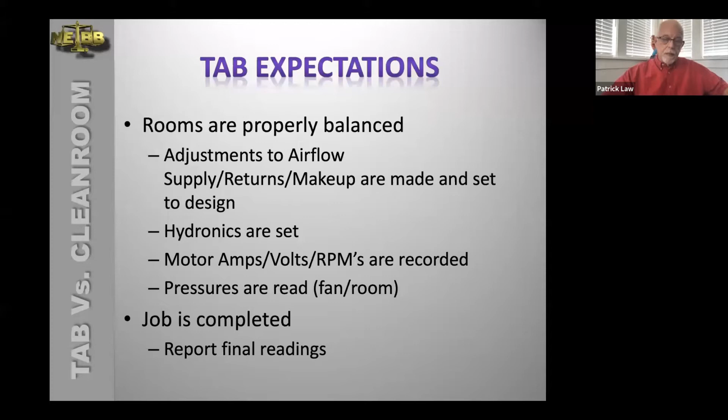Maybe in some cases you get into the room and look at the pressures there as well, but generally on most TAB jobs, I don't know that you guys do the pressures from room to room or rooms to outside the building, but that becomes a big part of what we do. But your job is completed and you report your final readings. From a clean room standpoint, the TAB is complete.

Various multiple clean room tests are conducted in a sequence. Results are evaluated for acceptance. If out of compliance, adjustments are made either by us or maybe others, and a lot of times this goes back to the TAB technician. If something needs to be adjusted for one reason or another, retest to verify compliance. Final results are done and a certification is issued.

And then here for us, documentation becomes extremely important in a lot of the fields we deal with. It seems to rule everything they do.

Briefly, types of clean rooms that are out there. You have unidirectional, and unidirectional usually means roughly that 80% of the room is supplied; it's got media coverage, not necessarily the frames. That's taking the frames out, but the media itself where the air enters the room. Usually 80% of the ceiling, sometimes a wall, but that clean room will have 80% media coverage where the airflow is flowing in at 80% of the ceiling.

Non-unidirectional type of clean room. This could be anywhere from having HEPAs scattered throughout to having just a few, to having 50% or 60%, doesn't matter. As long as you don't have 80%, you're not unidirectional.

Membrane clean rooms are a type of clean room we don't see much anymore, but they can be very effective in what they do. A membrane ceiling will have HEPA filters that enter into a small space that's confined below the ceiling, and you put a membrane in that repressurizes that small enclosure, and therefore directs the airflow evenly across that whole room, as opposed to just at the points where the HEPA filters are in the ceiling.

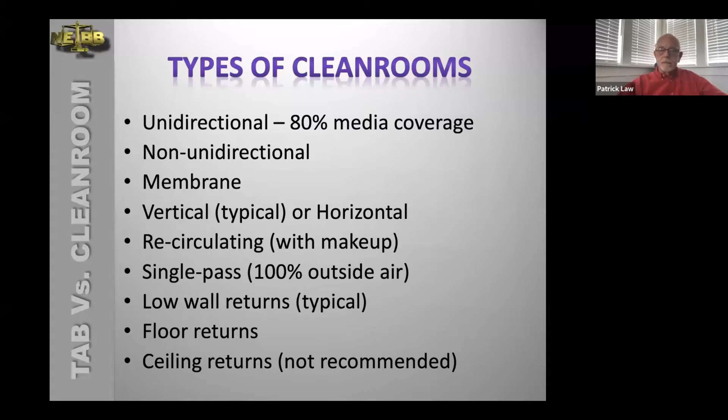Clean room styles: you have terminal HEPA filters. They can be ducted, which is, again, the most common. You'll have either 10 or 12-inch ducts that run off a fan, a duct run or something. You do have filter fan units. We call them FFUs, and they have their own onboard motor blower. And the HEPA filter, again, typically 24 by 48, same as ducted HEPA filters. You'll have some 24 by 24s on the fan filter units as well, or even some larger ones now. But these filter fan units all have an onboard motor blower.

So generally what happens is you have an interstitial space above a clean room that has a bunch of these terminal HEPAs that are filter fan units. They don't provide any conditioned air. All they do is recirculate the air. So you have to bring conditioned air into that same space from your main AHU, and then the return. So you have a mixture of these filter fan units that are supplying the air changes that might be required for that particular clean room. You don't need as big a fan other than the cooling capacity to help cool that space.

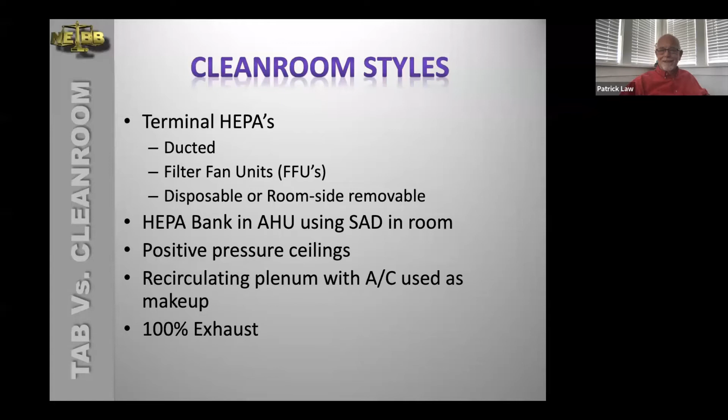So regulated industries: you have pharmaceutical and medical device that go on FDA guidelines, and a couple others. You have compound pharmacy. A lot of hospitals follow guideline USP 797, and every hospital that does any kind of compound pharmacy, which is almost every single one of them, has got to have a clean room installed and working properly. So there's a lot of potential there. And this is somewhat new, probably in the last 10, 15 years. So they're still trying to learn what's needed and required.

Because there's so many hospitals across the nation, in TAB you're going to find yourself in a lot of hospitals. There's a lot of work that can be done there, and understanding what's needed, because you do have some positive and negative pressure rooms required in a 797 facility, and that's in every hospital that does compound pharmacy. Hospital operating rooms will sometimes have HEPA filters and clean rooms in them. It may be a wall of them, or it may be above them. I've seen both.

Isolation rooms sometimes have some filtration, other than just limiting the pressurization. Bone marrow rooms, I've seen those where right up against the headboard you have a whole bank of HEPA filters, because the immunity of people getting a bone marrow transplant is almost nil. So they've got to keep out as much contamination as they can when that person's having that done. So these bone marrow rooms will have HEPA filter banks in them as well, horizontal rooms.

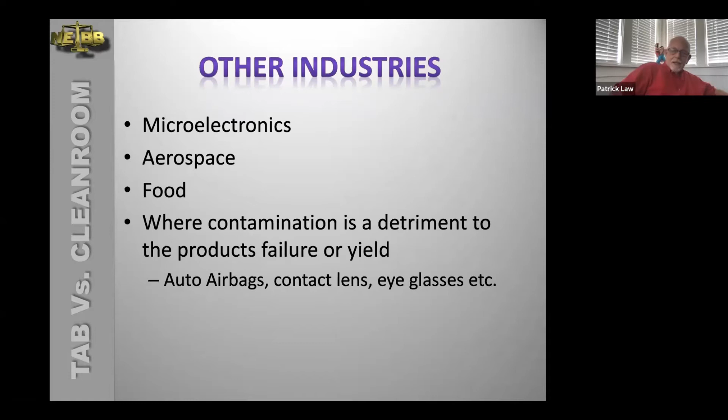Your product yield will go up a lot, because the air in general is clean. It's doing its job. At least the one I tested seems to be doing its job. So it's just a matter of it picking up all these extra particles that are in the environment because of the airflow being as great as it is and nothing being cleaned. And they reported back to me 2 weeks later that just by doing this, and I think they did it once a week, they had increased their product yield by another 15%. So other industries do use clean rooms and HEPA filters.

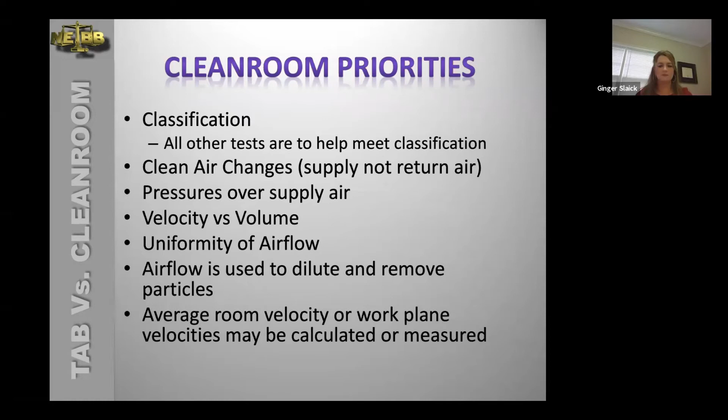Okay, I have one more question. This individual says, are they talking about a biological safety cabinet? Yeah, that may be. In a biological safety cabinet, you do a negative, then you actually use a hood in the reverse, and they have them that are made for biological safety cabinets to do that. And they do call for blanking off part of that, because they don't have one that fits every size, but yeah, you can blank off a small portion of that.

It's usually an 8 or 10 inch opening, and your flow hood should be the majority of that. And if it doesn't reach to the end of it, yeah, you can take a little bit of that off. But that would be the only time that it would be. But you don't want to use a real small one and blank off half of it either. You're still going to lose a little bit because of that back pressure. Okay, thank you.

So we're talking about clean room priorities here. Velocity versus volume a lot of times. Not all the time, but again, if it's a unidirectional flow room, we're going to take velocities on that. We're not so worried about the volume there, but the uniformity of that velocity. Hence the second point, uniformity of the airflow.

That's important. Airflow is used to dilute and remove particles, and that's why these are up there. They don't bring any in. They're just used to help dilute and remove particles to keep an environment that is to a particular level. And it may not be 100% particle free, but it's got to meet certain requirements of particles per cubic foot or cubic meter.

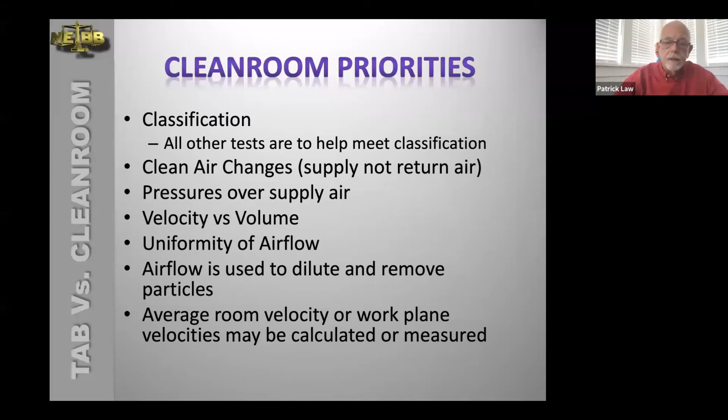Average room velocity or work plane velocities usually can be just calculated. They're not measured as easily as calculated. I think we're changing that. In clean room testing, we have 4 mandatory tests that are conducted. We get the airflows, which you guys do already, and room pressure differentials. You guys know how to take room pressures, so that's something you know how to do already.

HEPA filter leak testing, that's probably out of your ballpark if you haven't done that. And cleanliness classification, again, if you have never done that, it's a little bit to get caught up on. But most of the tests done in clean rooms, of the 4 mandatory tests, you guys know how to conduct half of those already. You may have to look at specifics on airflows because there are some differences, but the instrumentation and most everything else is pretty similar to what you already know.

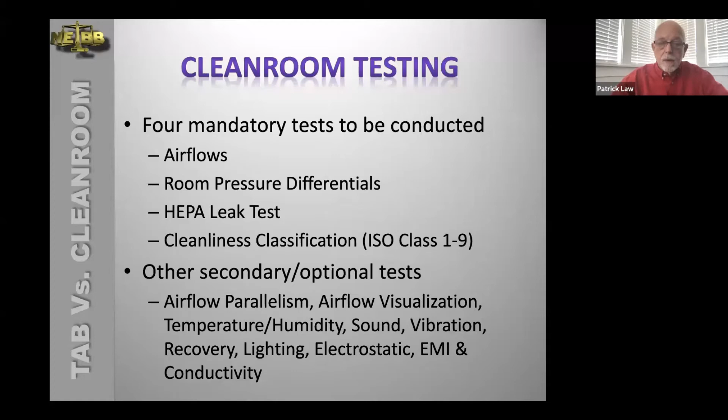Here are the other secondary optional tests that we do: airflow parallelism, airflow visualization, which is similar to that, temperature, humidity, sound, vibration, recovery, lighting, electrostatic, EMI, and floor conductivity. EMI is electromagnetic interference. The electrostatic, EMI, and floor conductivity are found mostly in semiconductor, where it's more critical to their process.

Test methodology, again, the major difference between our 2 disciplines is that TAB uses one source, when you look at how am I supposed to go out there and do a test and balance on this project, as a NEBB technician or professional.

Your one source is the NEBB procedural standards on testing and balancing. And there's not been a whole lot of major changes to that methodology in the last 50 years plus that NEBB's been in existence. However, clean rooms, we have multiple sources and choices. It's always evolving, and audits and justifications always seem to be evolving the standards by which we test and certify clean rooms, unlike what TAB's had to do in the past or currently does.

Pat, I have two questions, if I could pause you for just a moment. Sure. The first one: is there a certification for performing DOP testing, dispersed oil particulate testing? Ask that again. Is there a certification for performing DOP, dispersed oil particulate testing? And there was something else.

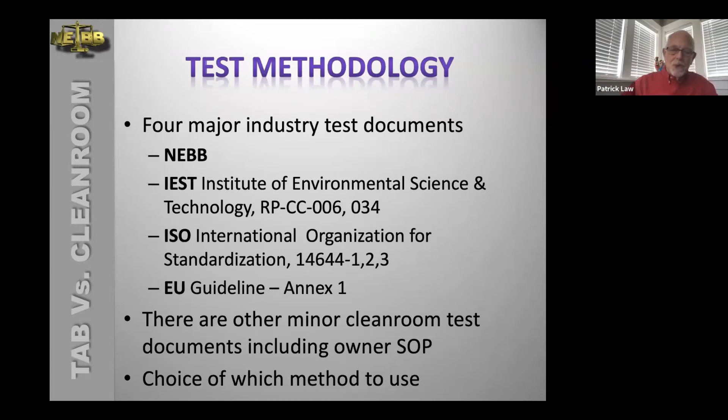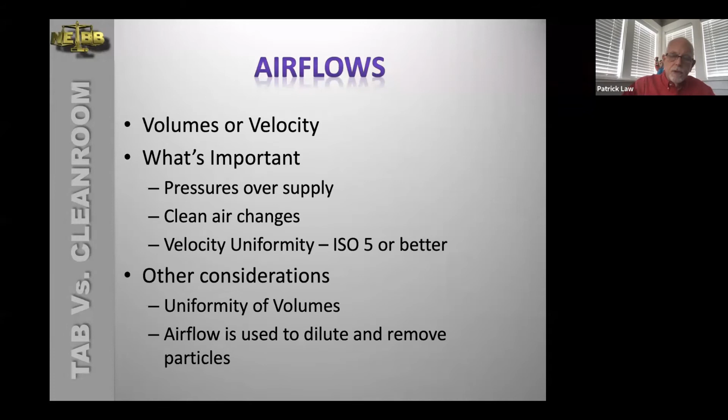And when it comes to airflows, other considerations: uniformity of airflows. Even when we don't have a lot of filters in that room, to keep the distribution of temperature and such across the room, they still have to be balanced just like HEPA filters would be in, say, 80% ceiling coverage. And again, airflow is used to dilute and remove particles. Air exchanges, a little bit of difference here.

Nominal air changes is the amount of outside air ventilation from one air handler entering a building or zone, but it does not include recirculation air or the distribution of the ventilation air to each space within a zone. Unlike space air changes, which is what we deal with. What's important to a clean room is to calculate these space air changes, because it compares the supply airflow rate to the volume of the space that you're testing.

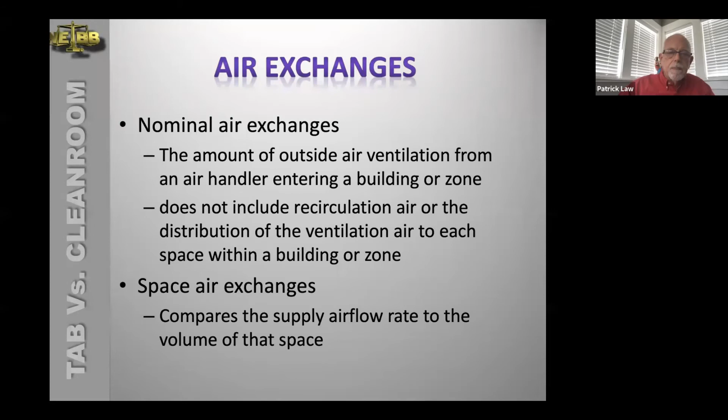Airflow volumes done are very similar to TAB, best if done the same. A lot of times we may have to ask, do we use back pressure on this? Do we not? Curtain size, as I said, that was one of the questions that came up, but the curtain size should always match your register filter size or whatever else you're measuring there.

And what we do a lot of times is we like to check ours against a TAB. Sometimes we'll be on a facility where TAB's still doing TAB work in another part of the building that doesn't affect the clean room. So they may still be on site, but they may have completed the clean room. And sometimes we'll get with the TAB people and say, hey, what are you doing? And we'll compare our flow hood to their flow hood, and maybe put a factor in if we need be.

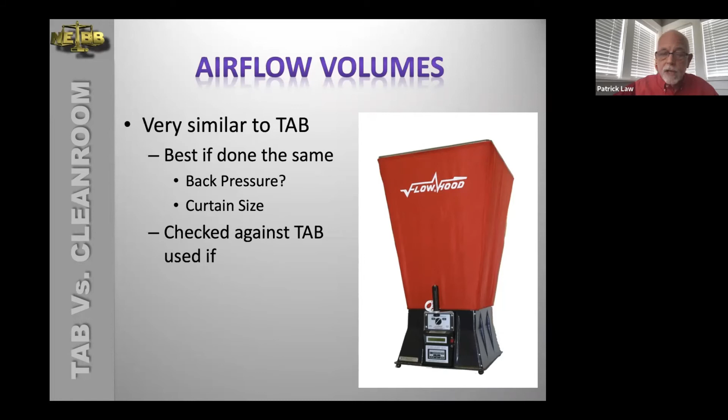Hey, Pat, we had a question about the chart that you showed a slide or two ago. What ISO standard is the chart from? Well, this typical air change chart is not from a standard. This is just typical. Somebody put this together. There's no industry standard out there that says in order to have an ISO class 3 clean room, it has to meet a minimum of 360, greater than 540 air changes, like that chart shows.

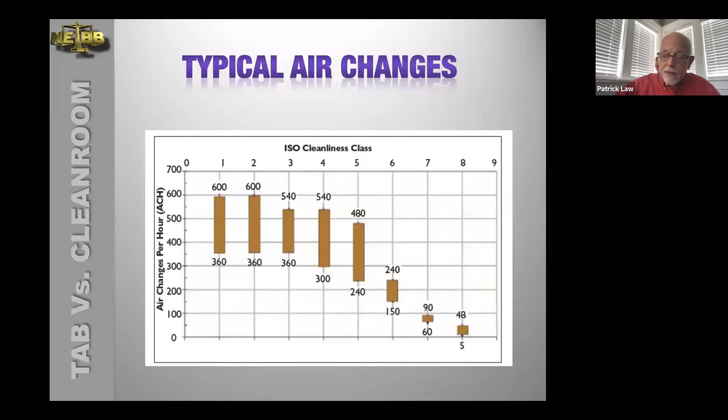This is just a recommendation, and it really is what's been a part of clean rooms for the past 75 years probably. This is what the industry has found to be the needed air changes in order to meet these classifications. There's not a standard that says you have to have that. Thank you.

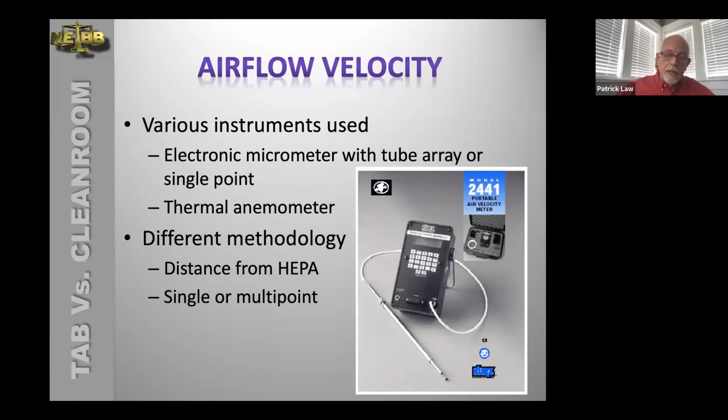Velocity instruments: varied types of instrument, electronic micromanometer or micromanometer with a tube array or single point, thermal anemometer, maybe. Different methodology, distance from the HEPA filter, or single or multiple point. Do I use a single point on this one? Do I have to use a multiple point? How many inches do I have to be down? Listen, it all gets a little bit different.

Some of the concerns are the location of readings, reproducibility by technician, and the repeatability of the readings. That repeatability might be from time to time. We go back every 6 months on a lot of our jobs, and we want to be able to repeat the same methodology and get relatively the same answer. Even reproducibility between technicians, or within the same one, they've got to be able to get that same reading over and over again. So we try to do these so that we have readings that are repeatable and reliable.

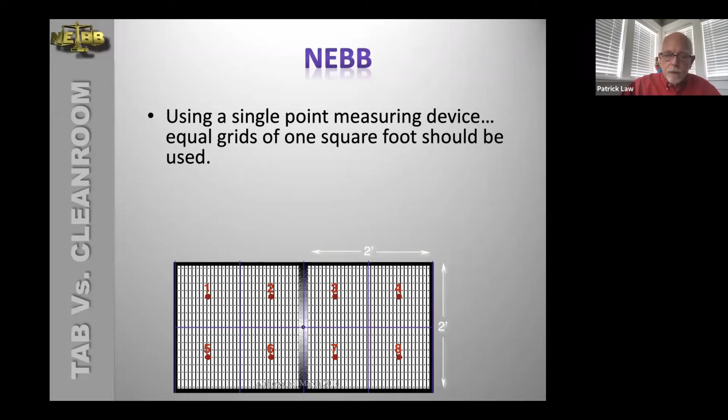I'm going to go through this real quick. Let me back up here. A single point, in our standard and most standards out there, not all of them, believe it or not, requires that on a typical 2x4 HEPA filter, you do minimum grids of 1 square foot. So you would have a total of 8 readings on a typical 2x4 HEPA filter. If you're using a multiple point, it says do 1 per every 4 square feet.

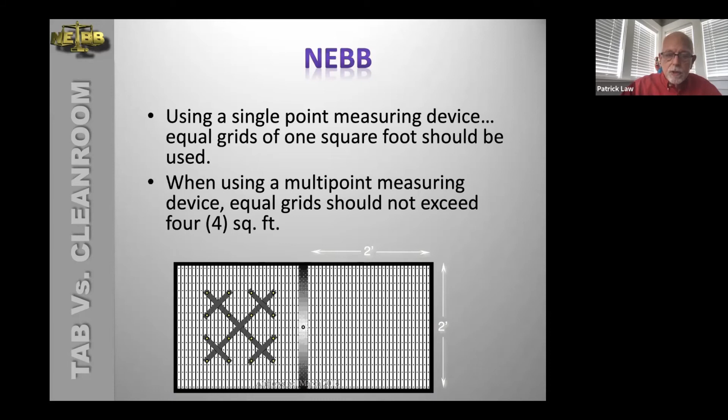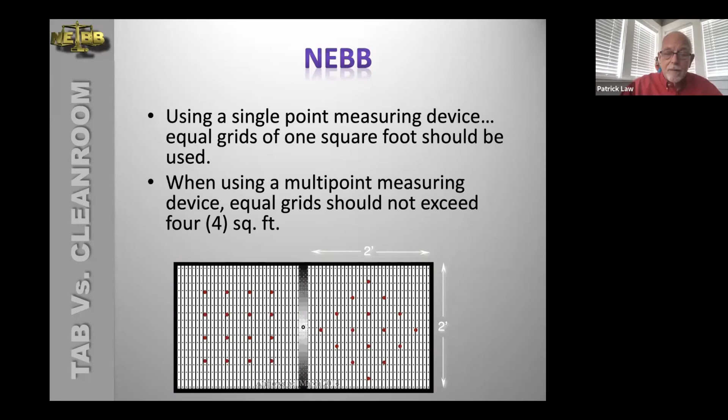These two animations have to do with the 16-point velgrid that you find on a Shortridge, which is used a lot, and some of the others have something similar. If you notice, there's 2 different ways this could be applied, and you get 2 different results. Notice the pattern it takes of the filter; you will get different results depending on how you take it. So my point is, take it the same way all the time. And if you document how you took it, then when we come back, we have that same method.

I'm going through this one to get it out of the way. Variation, going to get it out of the way here.

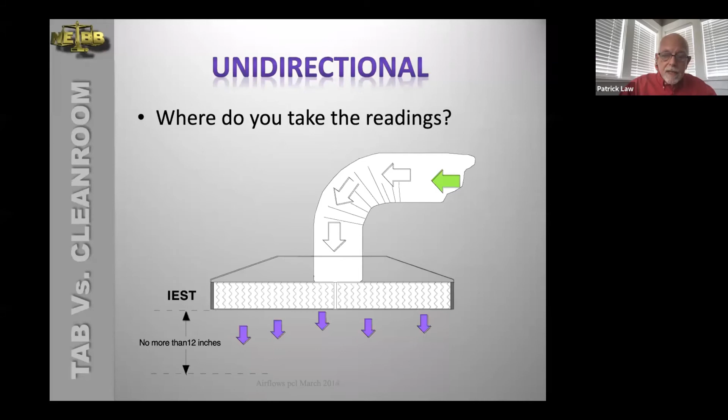Unidirectional, where do you take the readings? Again, like I said, there's multiple standards out there that we have to deal with. IEST says no more than 12 inches from the face of the filter. ISO says 6 to 12 inches. NEBB says take it at 6 inches. So we have 3 standards that say it a little bit differently.

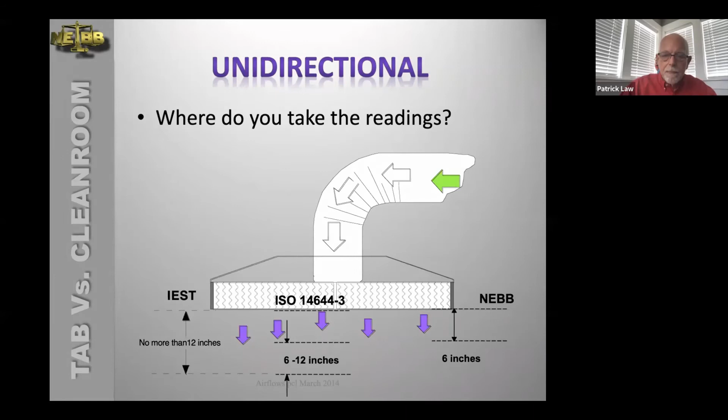But all of them, you can take it at 6 inches and you would meet the requirement. So that's something you have to look at and say, hey, it meets IEST. Yes, it's between there. Okay, it meets them all. Non-unidirectional, a little different. Again, no more than 6 inches now from IEST rather than 12 inches. Again, ISO's the same and NEBB's the same.

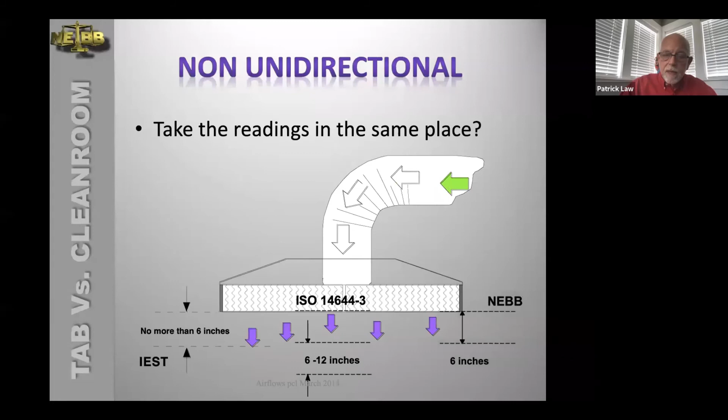Considerations: you document your test method when taking direct velocity readings, how far away you were, and if you're doing a multiple point, how did you orientate it? So that again, it can be done again. Again, when taking volumes, hood curtain should match the filter frame.

Adjustments often use the K sub V factor to calculate, and it adjusts velocity readings when a flow hood won't fit over the equipment due to interference. Again, I know you've been to sites where you're taking readings, but they put a piece of equipment under the supply air diffuser and you can't get a hood up there or whatever.

So what do we do? Now, a supply air diffuser is a little bit different than a HEPA filter. The HEPA filter is still going to exit airflow out and coming down, but I can't get the flow hood up there. So we have to use our velocity at that point and then come up with a K sub V factor to adjust that velocity to what the actual volume might be.

In the industry, we recognize the pitot tube, which we don't really use that much to measure airflow velocity or volume anymore, other than in large ductwork sometimes. But if you have the correct ideal conditions, your duct diameters are right and you have enough upstream and downstream of where you've done your holes and you're taking your readings, then a pitot tube is going to give you the most accurate result.

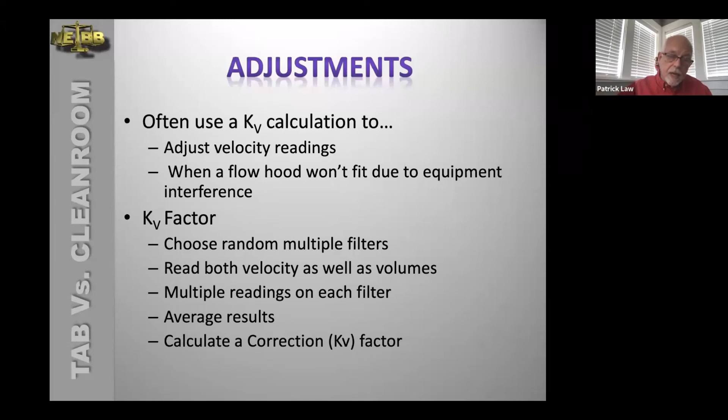And again, very briefly, because I think it's important for you to know, you would choose random filters, multiple filters, 3 or 4 maybe in a room, that are unobstructed, that you can read with a flow hood and velocity as well. So you would read both the velocity and the volumes multiple times on each of those, say, 4 filters. And then you would average those results and calculate a correction K sub V factor.

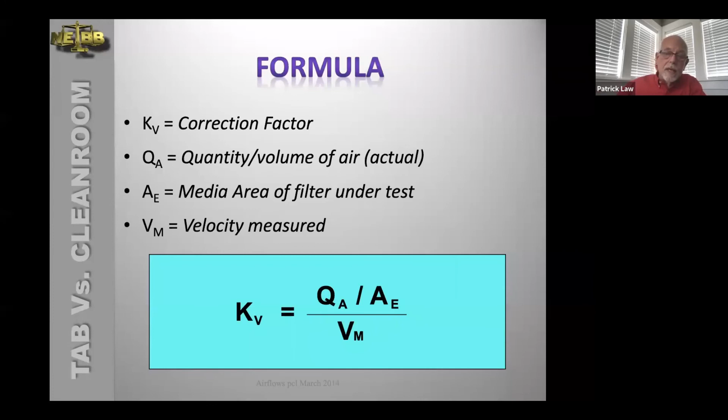So then you come up with a K sub V factor that, when you use the velocity instrument to read that velocity underneath the HEPA filter where you can't get the hood, you would now apply that K sub V factor times that velocity in order to get a corrected volume. That's what that's for. Example, I'm going to get off an example here for you to move along. An acceptance criteria for that. All right.

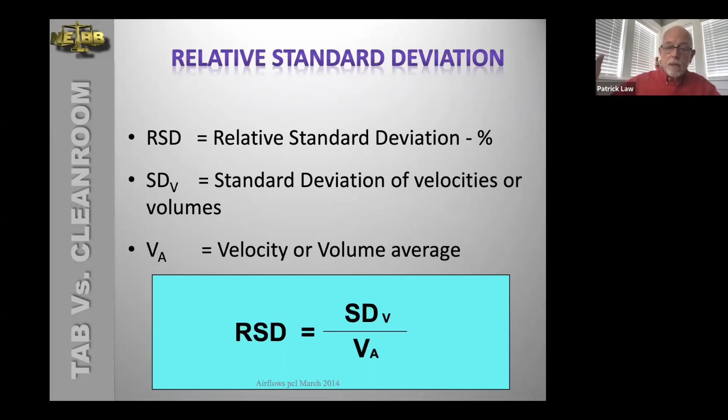Relative standard deviation when it comes to airflow. And that's simply the standard deviation of velocities or volumes divided by the average velocity or volume of those same filters that you tested. And in our industry, the relative standard deviation, almost everything we do has to be less than 15%. So whether we take volumes or whether we take velocities in a room with unidirectional flow, this relative standard deviation must be 15% or less. So that's another thing, again, when you're going out there testing, that's how important it is even in rooms that don't have, that you get these volumes closer together.

Room pressures, most interested in differential pressure between room versus the ambient. The range of differential pressures range from 0.02 inches to 0.07 inch water gauge. And the hierarchy always depends on the classification. You will always have your pressurization start at your ISO 1, if that exists in that clean room suite, to a 2, to a 3, and so on, all the way down to a 9, or to your uncontrolled area.

Just so you know, I've never, and I've talked to a lot of people in the industry, this ISO 9 is a new classification that came out. And to my knowledge, I don't know anybody that's ever used it. It's not even a clean room. It's hard to even say it's a controlled environment. It's so outrageous at the number of particles that are allowed in that environment that we don't even know why there is an ISO 9.

But from ISO general range right now, we go from 1 to 8. So you would have your pressurization cascade from the highest or the lowest cleanliness class ISO 1, if there is, or 2 or 3, whatever that lowest number is, through 8 to an uncontrolled area. A lot of times we take pressure drops on the HEPA filters in the room and record that at new and watch that over time to see what the decay is, so we can give an idea when it's time to change them if they're not doing their job.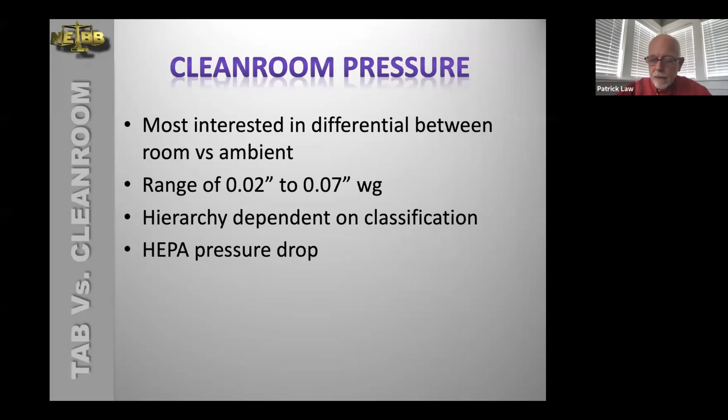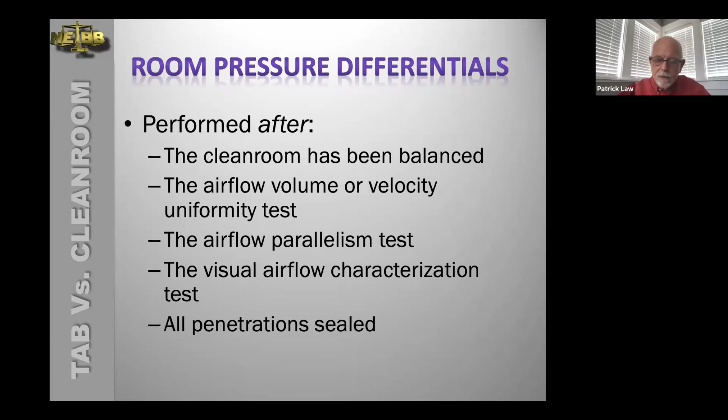All right, room pressure differentials are performed after the clean room has been balanced. The airflow volume or velocity test has been done. The airflow parallelism test, if you're doing that, is done. The airflow visualization test has been done, and all penetrations are sealed. Prior to conducting the test, there are several transient conditions that affect the room pressures: intermittent operation of exhaust hoods, wet stations, ovens, etc. Again, we find tons of those in these clean rooms.

There may be fume hoods in there. It could be biological safety cabinets. There's a lot of exhaust of some of the equipment that's in there because of the heat. It gets exhausted out. So again, as you know, that affects pressure. So when we test, we got to make sure that these things are operating, or if there's any kind of actuating damper that's controlling. If this exhausts, do we up the volume in our makeup air to compensate that and such. So all this needs to be working and operating.

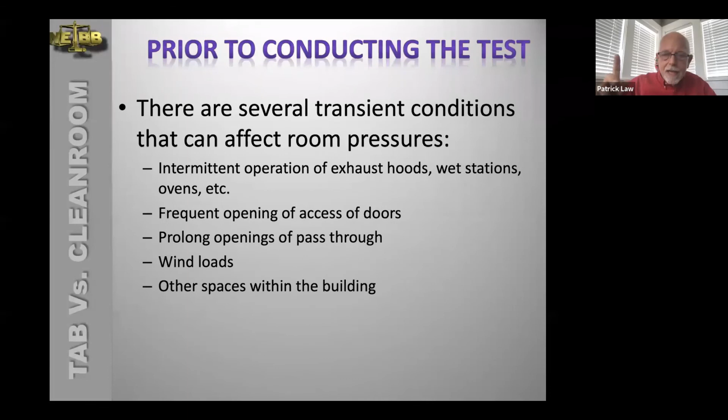Wind loads, listen, I haven't seen that an awful lot. I had one case of it I was going to talk about, but I'm moving on. Conducting the test: electronic manometer, room pressures. I don't think I need this, I'm going to take this off.

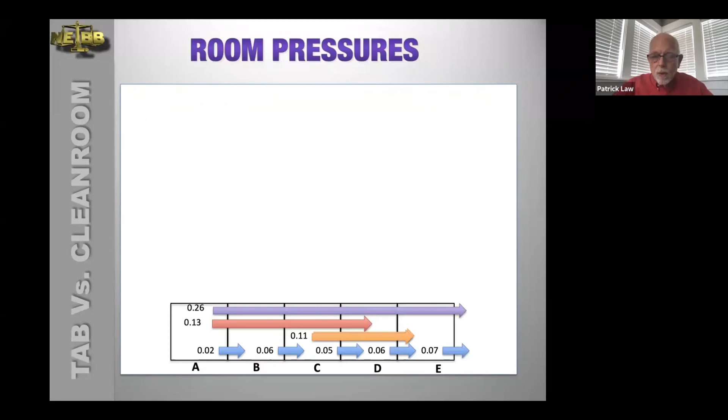Talking about it really briefly: if we had a pressure difference between all these 5 rooms, we can, without measuring from A to outside of E, the outside uncontrolled environment, know what the pressure was from A to outside. I can calculate that by adding those pressures together, which adds up to 0.26. And likewise, I can calculate pressures between different zones if I know all the pressures of each zone, just by adding, or maybe even subtracting, where I have a negative.

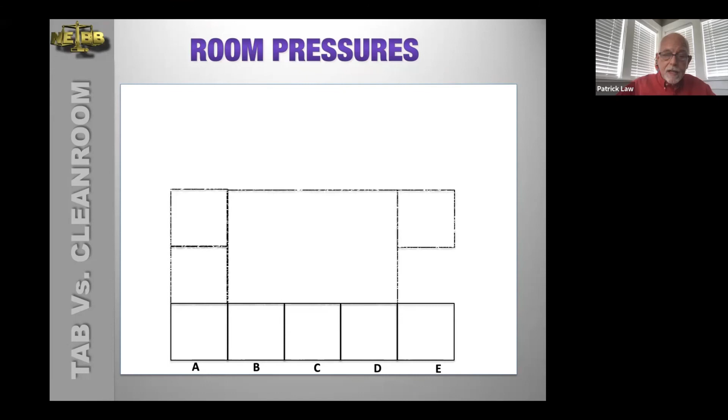I've got a room that's negative to something, but the same way, if I add these all up using that one as a negative, my pressure from A to the outside has now changed. But I likewise can still recalculate different pressures. And I know I'm going through this a little bit fast. I added some rooms and talked about this, and another pressure, but we're moving on.

All right. Acceptance criteria: typical pressures for the guidelines that are out there. You won't find a standard on this, but you'll find a lot of guidelines; the FDA's got a guideline on what it ought to be. The industry will usually have their own SOPs saying the pressure between this room and that room has got to be so much. But typically it's 0.02 inches to 0.06 inches when cascading from one class to a space of another class, or 0.04 to 0.07 when going from controlled to uncontrolled.

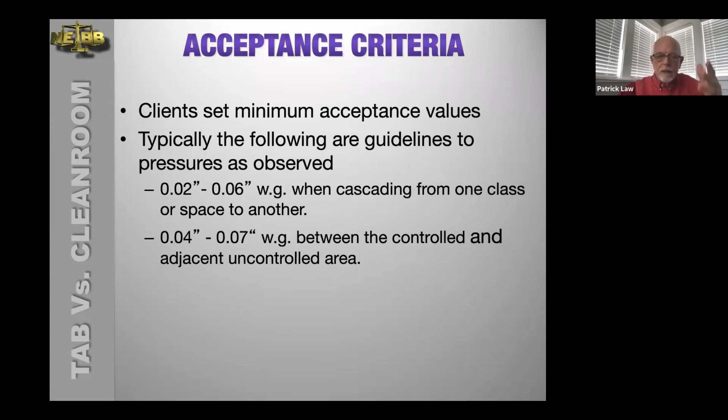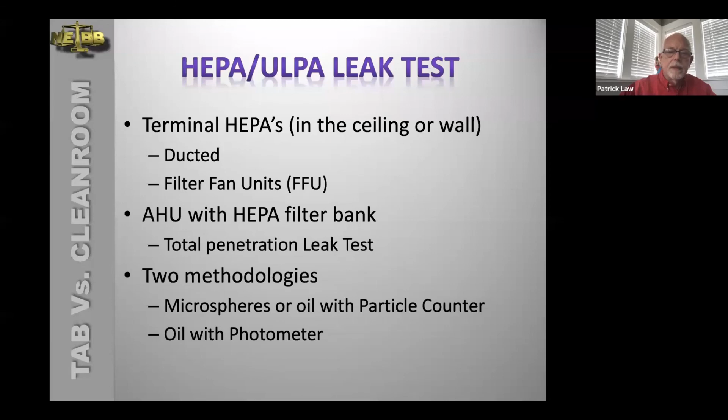The first room you walk into could be an airlock. You may walk from an uncontrolled hallway into an airlock, and that airlock into a gown room, so you have these different barriers, and the pressure from that airlock to the uncontrolled space is going to be higher than between rooms within the clean room suite. Temperature, humidity, duct diversity we talked about. Leak testing, again, we talked about that.

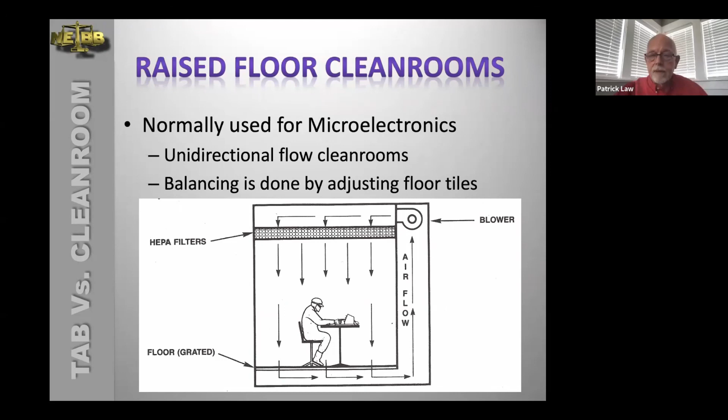That's a typical raised floor clean room where you have a fan supplying, maybe with whole ceiling coverage going down to the floor, so any contamination released at the product level gets washed down right away, rather than going side to side to the sidewall returns where it might have the chance of cross-contaminating.

If you're bidding a clean room job, reach out to a NEBB certified professional. They can probably help you avoid some of the costly surprises when bidding or performing a job. A clean room certifier and company can be a good sounding board. My conclusion is, when balancing a clean room facility, if the TAB contractor has a better understanding of what will take place after they complete their balancing and what is expected from the owner, it will help ensure a successful outcome when the clean room is turned over to the owner.